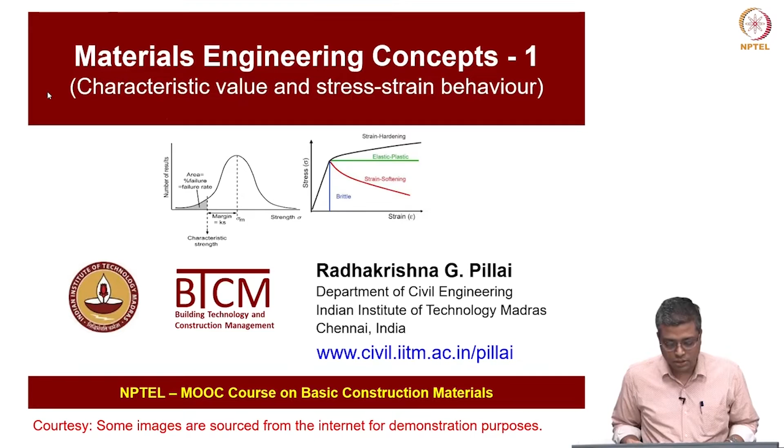Hi, today we are going to cover characteristic value and stress strain behavior of various materials. So, there will be 3 lectures which I am planning in this materials engineering concepts. Today is the first lecture, and these are the reference books which I use in this course module, and also we use a lot of information or photographs etc.

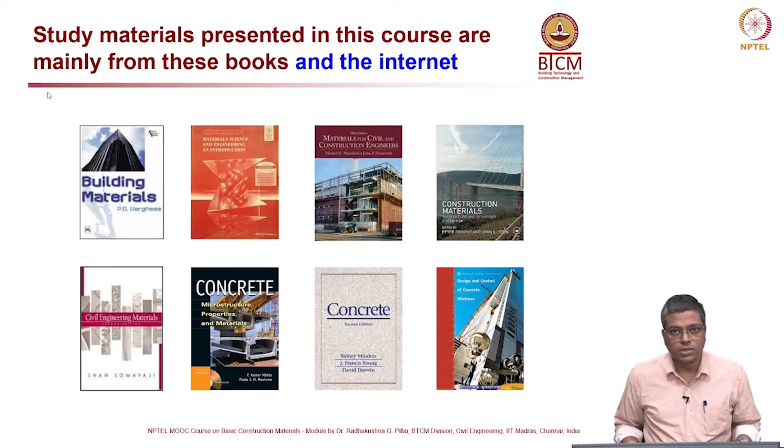from the internet. Now, the outline of this lecture will first cover variability in various material properties, and then also how to address this variability in the properties in the design process. That is where we use something called characteristic value, and then also we will discuss the stress strain behavior of various materials. We will cover elastic modulus, Poisson's ratio, yield strength, strain hardening, necking and failure, etc.

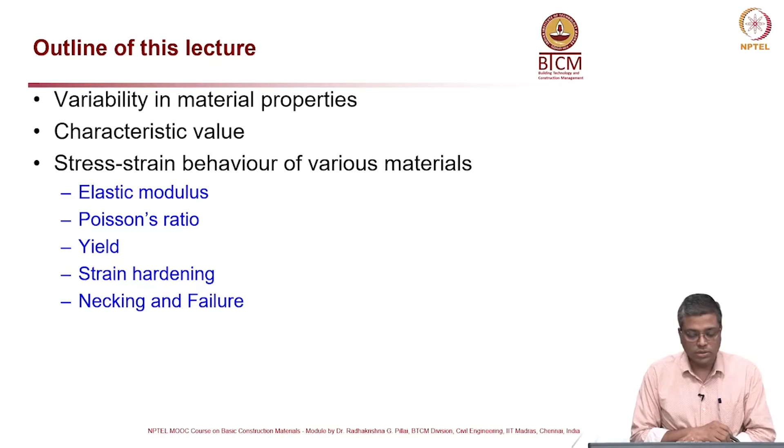So, variability and comparability of properties. I am going to cover just 2-3 material properties to tell you where we see the variability and what it is about. So, first let us talk about density. What is density? It is mass of a material per unit volume of the material, and it can vary significantly from material to material. From wood to metals, there could be an order of magnitude difference of about 2.

Another parameter is stiffness, which is the ability of any material to resist deformation, and it can vary. From nylon to diamond, it can vary in 3 orders of magnitude. And strength is another very important parameter which we look at while designing. Most of the time we give a lot of importance to the strength of the material, and it is nothing but the maximum stress that the material can resist without failure. From concrete to diamond, there could be a difference of 4 orders of magnitude.

Now, toughness is another parameter, which is also known as work to fracture or fracture energy. What is it? Its ability to plastically deform and absorb energy until a failure occurs. Okay? If you look at glass, the toughness is very low, whereas if you compare that to a very ductile material, the toughness can be very high. In other words, ductile materials can absorb a lot of energy before they actually fracture or fail.

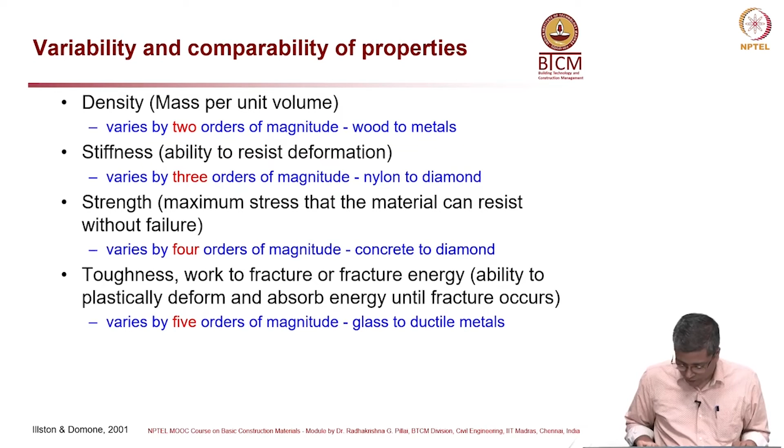Now, this is a table with these properties we just discussed. I do not want to go through the entire table; you can pause the video here and have a look at this table for a few minutes, and then you can understand the variability of these different parameters across different materials and also within the same material. For example, if you look at concrete, the density can vary from 1.8 to 2.5. Stiffness of concrete varies from 20 to 45 GPa.

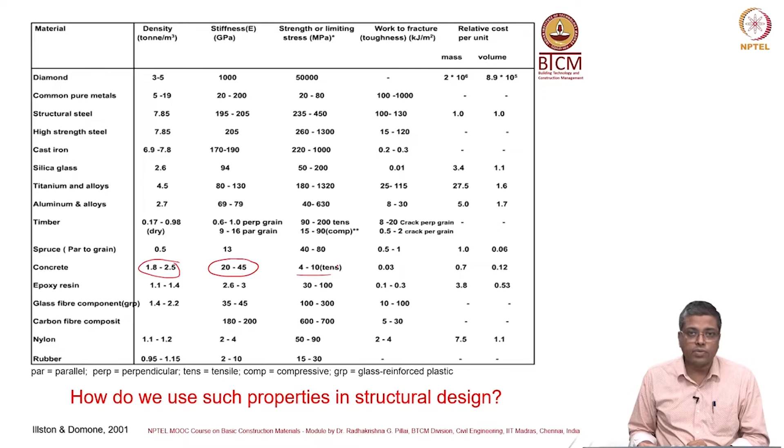If you are talking about strength, again we keep on modifying concrete. So, we see a lot of variability in the same type of materials by changing small things or the material design. So, in industry or when we practice, we see a lot of such variations in the properties of materials. Now, how do we use these properties in the structural design? We have to take care of the variability while designing, and at the same time we need to be safe.

Before we talk about that safety, I would also tell you about different materials which are used for similar purposes. For example, let us say you want to design a tension member in a truss. There you could use steel, you could use timber; many options are available. Here you can see steel in a truss member and also wood. Both can take tensile loads. So, for the same application we can use multiple materials. Now, in such a case, how would you choose a material?

For example, here also you have a brick column and a concrete column. Both will have different strength. So, we look at the availability of the material, how costly each material is, and also technically the weight of the material, the limiting dimensions, and the minimum useful life or the durability part of it. So, cost is very important, and then you have to look at weight of the material and then limiting dimensions.

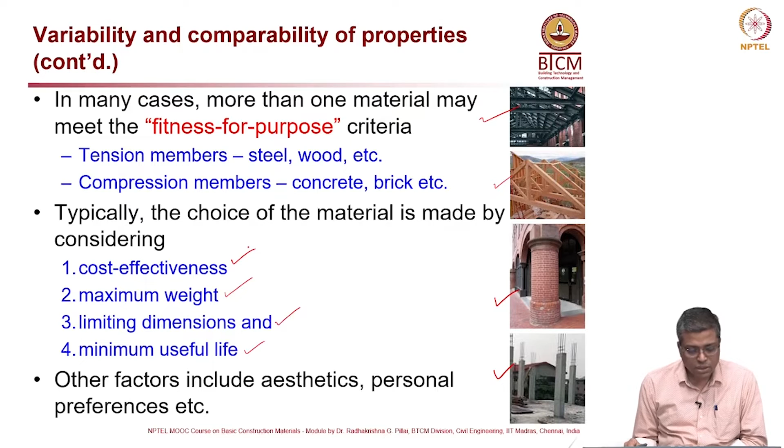So, we want to create more space inside our buildings, etc. So, these are different things which we have to consider. Aesthetics and personal preferences are also important to consider. Now, we talked about the weight criterion, right. So, how do we choose a material based on its weight?

So, here I am going to show you an example. I am not going to go in detail about this slide; you can view it later or pause and understand these equations. But the example here is a cantilever beam, where you apply a force F at the free end of the cantilever. The thick black curve is the cantilever beam here.

And then you have an equation which tells you the deflection at the free end, which is this u, and that can be expressed like this in the orange box. The equation is u equals F S cubed divided by 3EI, where S is the length of the cantilever beam, E is the modulus of elasticity, and I is the moment of inertia. By looking at the cross section we can calculate that.

For a rectangular section, I is defined as BD cubed by 12, and now you plug this I into the equation in the orange box and you get this: D is equal to (4S cubed over EBu) to the power 1/3. From that we can get an expression for weight, where rho is the density. So, you can simplify that into this orange box, an expression for W. Now, W is the weight.

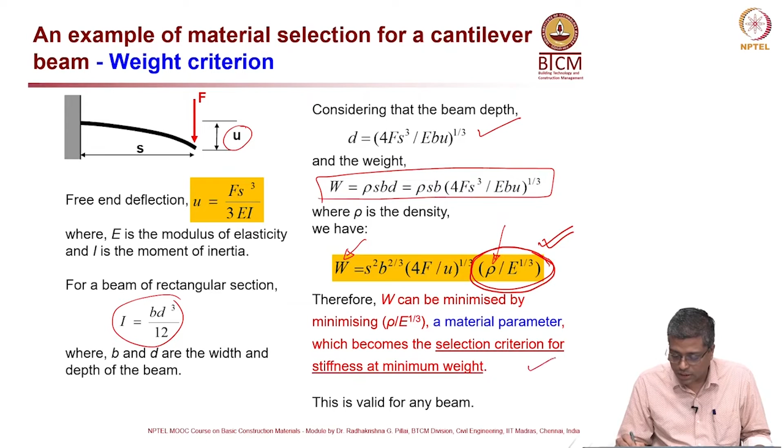That is the idea. So, weight can be minimized by minimizing rho over the cube root of E, which is a material parameter and which becomes the selection criterion for stiffness at minimum weight. Now, we also use strength as a criterion for designing material systems. For the same cantilever beam example, let me show you how that can be done.

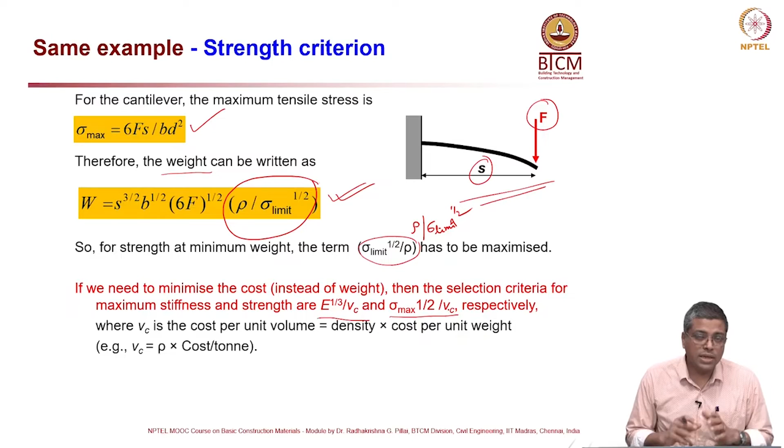So, you have to see whether you want to look at weight, strength or cost, what is your main criterion, and then accordingly come up with a formulation which will help you minimize or maximize a particular parameter, and this is generally adopted in various applications. It is not only strength and weight which you have to consider; money is also very important. That is why we also talked about cost. So, you have to think about various aspects and then see which is the most feasible solution for you to adopt.

Now, this is a table, you can look at this table here. For example, for a diamond, for the same application, I can choose different materials, but the cost is going to be exorbitantly high in case of diamonds. So, we may not go for it.

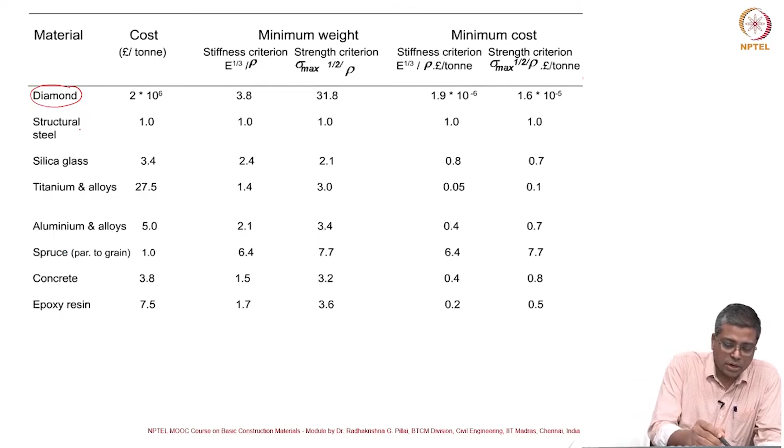But definitely people sometimes compare. Let us say for a building, if you are talking about column and beam sections, whether structural steel or concrete is the better option for you. There cost can play a role. For example, here cost in case of steel, if it is 1, in case of concrete you can actually reduce it; that is the main reason why concrete is sometimes more popular than steel.

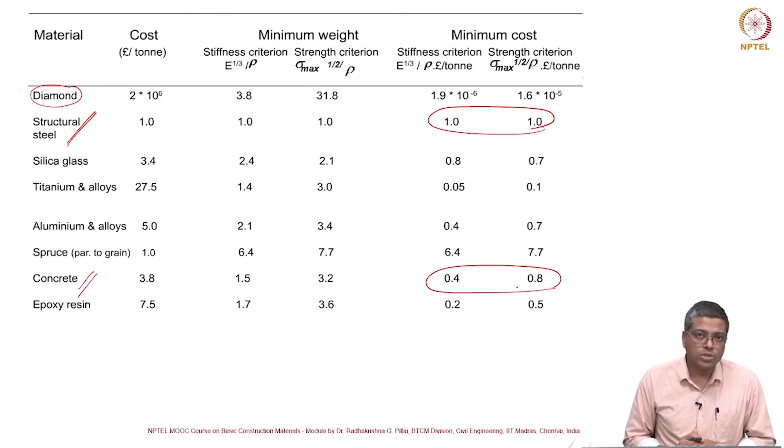So, different options are available, and you have to have tables or information like this before you can choose what material to be used. When cost is neglected, diamond, titanium, aluminum, wood, epoxy are the best, but that is not the case in most applications. When cost has to be minimized, conventional materials such as wood, concrete, steel might be more beneficial.

And of course, you have to think of the time and location where you construct. For example, wood might be cheaper where a lot of timber is available, but not in places where it is not easily or abundantly available. Concrete and steel depend on where the manufacturing plants and cement plants are located, and there are various factors which govern the cost of different materials. So, we have to think about the cost also while selecting materials, in addition to the technical features.

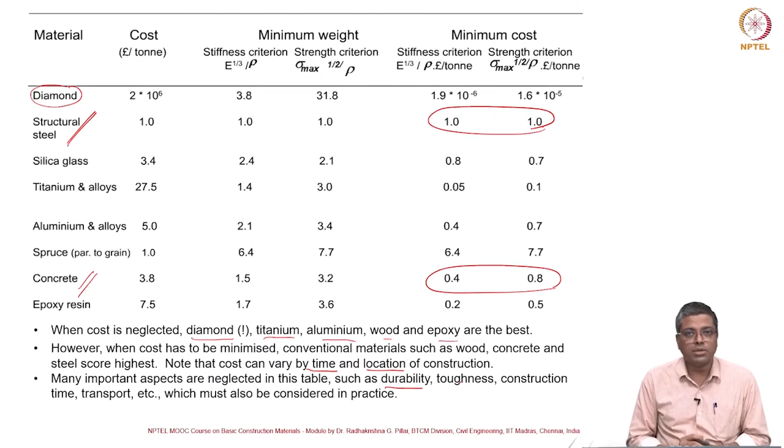So, many important aspects are neglected. This table is a very simple table. You have to also think about durability, toughness, construction time, transportation, and many other parameters before we really choose a particular material for construction.

Now, there is mean and variability in the material strength. For example, look at steel here; the T stands for tension, and C is for compression. If you look at steel with a mean strength of 460 megapascal, you can expect the coefficient of variation of the tensile strength of steel is about 2%, whereas the coefficient of variation for compressive strength of concrete can be about 15%.

Why? Because steel is a more homogeneous material compared to concrete, and steel is manufactured with much better quality processes in the manufacturing plant, whereas in concrete you use natural materials like aggregate. Cement is processed, but aggregates have a lot of variability in their properties, and the interface between cement and aggregate will be different at different points within the concrete. That also depends on how the concrete was placed and compacted. So, we generally expect a wider variation in the properties of concrete than steel.

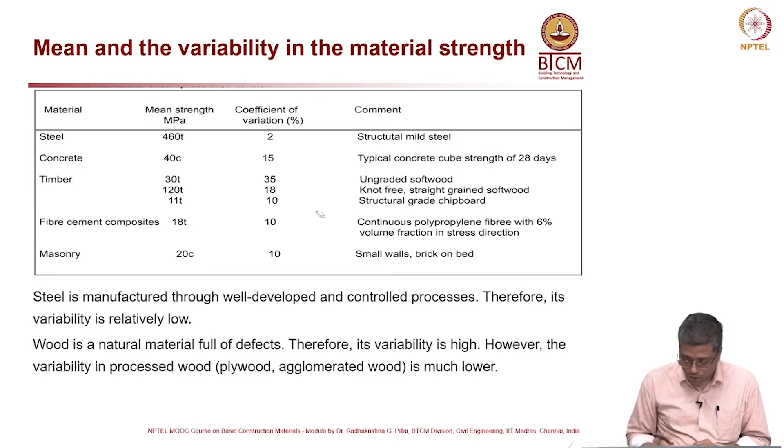So, you can see the variability across different materials, and that has to be considered in the design process. We cannot always use the mean value for design. If I use the mean value, it means 50% of the values are going to be above the design value and 50% below, so there is a very high chance of failure of the structure. So, what do we use? We use something called characteristic value.

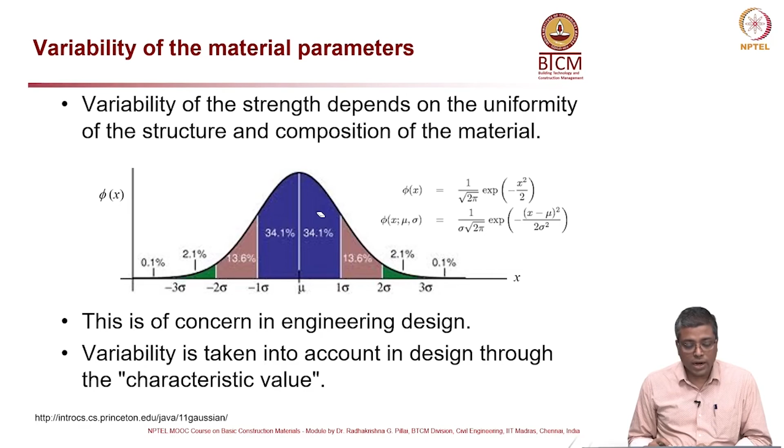Now, what is this characteristic value? The variability of the strength depends on the uniformity of the structure and composition, so a lot of variability is possible. We typically express this variability in terms of a normal distribution. In design and material selection, characteristic value is the value we can consider as a safe value, corresponding to a value at which the probability of failure is at an acceptable level. Look at the graph on the bottom left.

Let us say I do 100 tests on concrete cubes, perform the strength test on all those cubes, and then plot these 100 values; then I would get something like this.

The number of results will follow something like this. This is what we call normal distribution. Now, this is the strength of cube, it is plotted like this, and then for each value, how many specimens actually have that particular strength. So, on the horizontal axis or abscissa you have compressive strength, and on the vertical axis you have number of values, number of specimens which gave that particular strength.

Now, what I am showing here is the average strength of all those 100 specimens might be sigma m, which means on the left side of this vertical dashed line you have 50% of the specimens, and on the right side you have 50% of the specimens. So, here you have 50%, here you have 50%. That is the mean value.

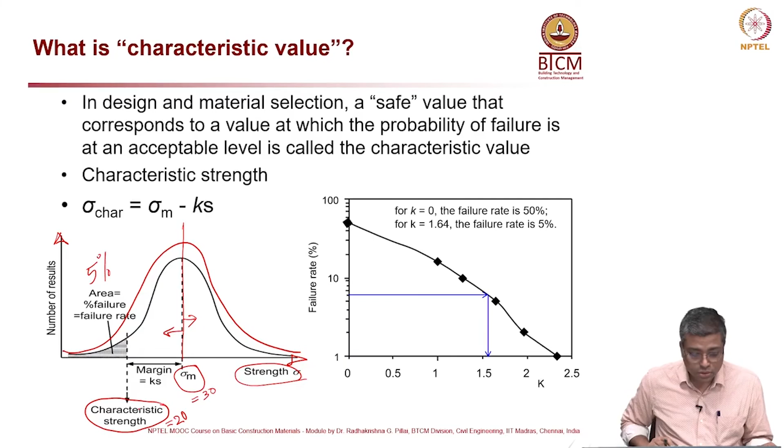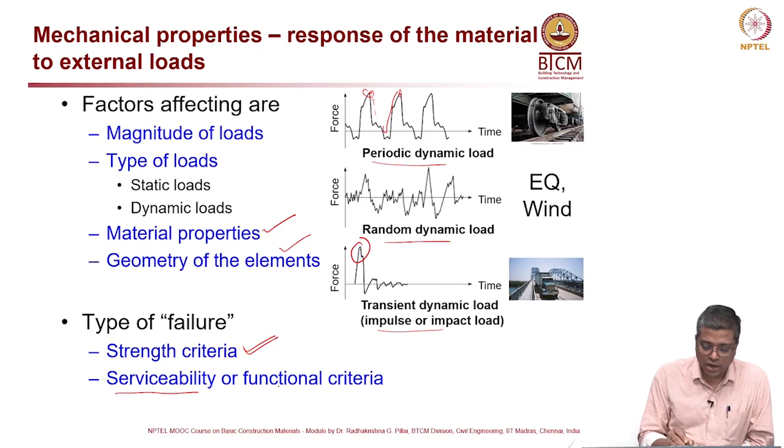Whereas, if I am talking about serviceability, maybe it is something like deflection. If you are talking about a bridge, I can say the deflection at mid span or the center of the bridge has to be within, let us say, 1 centimeter or 2, some limit you will provide for the deflection. It is not that the bridge is going to fall or break into 2, but there will be some deflection, and you want to limit that deflection so that it is comfortable to use that structure. So, that is one example of a serviceability criteria or functional criteria.